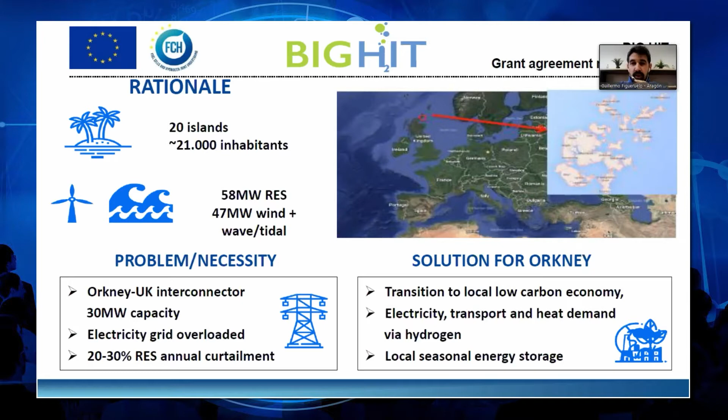So together with the Scottish government and the Scottish Fuel Cells and Hydrogen Association, they came to us in 2015, and we prepared the proposal for the Fuel Cells and Hydrogen Joint Undertaking, and we successfully won it. We are developing the project that you can see now on the screen.

So we have two main points of production of hydrogen: a 0.5 megawatt electrolyzer in the island of Eday, coming from ITM, the British entity, and also a 1 megawatt electrolyzer, same technology, same provider, in Shapinsay.

We store this hydrogen at 300 bar and distribute it among the consumption points across the islands via ferries. The storage is made in trailers provided by an entity from our region, which is a really important milestone for us, because we are committed to developing industry in our region too.

Which are the main consumption points? We have several residential uses for micro cogeneration, and we also have a demonstration pilot in a school to stay close to the community and the society.

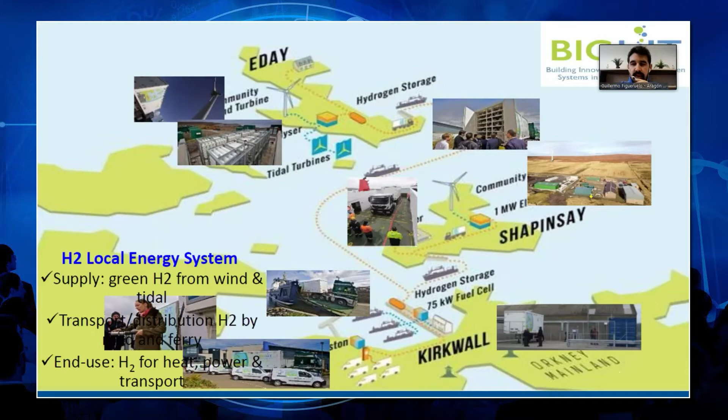We also have 75 kilowatts of cold ironing and grid service for ships staying in the harbor, as well as a small fleet of vehicles, Renault Kangoos. These are electric battery vehicles with range extended by hydrogen, in the main island, Kirkwall.

As I said before, we are currently in the demonstration phase, so we have started to see the local and wider impacts. This is the first pilot project of its kind taking place in Europe, so awareness and visibility are crucial.

We are also validating business models for the integration of renewable sources locally and in other locations, and we are helping to overcome grid constraints and reduce curtailment, which means generating more money and more local business for the community.

We are also boosting the local economy through local skills and upskilling of qualified jobs among the inhabitants. We're glad to have been included in the panel of good practices in Europe, because this means we're doing some things well, but we're also making mistakes since we're learning by doing. Hopefully we can publicize these lessons learned to other consortiums, other ideas, and other regions, so they don't make the same mistakes as us.

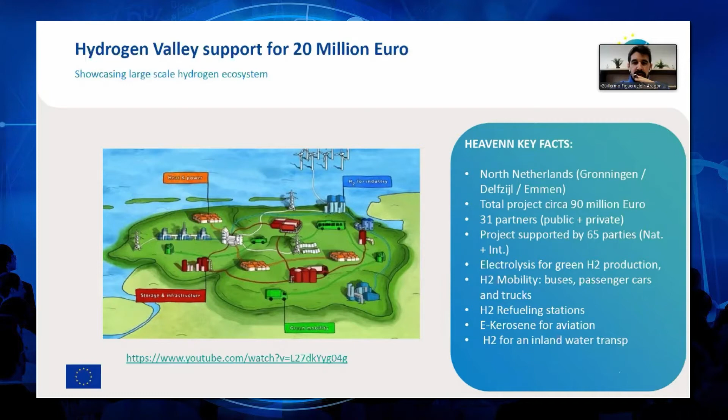We are also collaborating on a project that will start next January, also coming from the Fuel Cells and Hydrogen Joint Undertaking, from the last call that took place in April and that has just been evaluated. It will take place on an island — Mallorca, here in the Balearic Islands in Spain.

And well, we don't have a main role here, as you can imagine, nor in the HEAVENN project, but we are there for the replicability tasks, as well as for several transversal and cross-cutting activities that will support it and that are even more important these days. And I also have to mention this to give the overall scope of the hydrogen valleys concept and what is also moving outside of these European calls.

We have already seen in a previous speech that the project development assistance has already started. One case is taking place in Poland, and several cases are taking place throughout Europe. We are working there as an observer network, thanks to the experience we gained in BIG HIT. We have been called for that role, and we are very glad to help all the regions overcome their barriers and demonstrate that they are committed to the hydrogen economy.

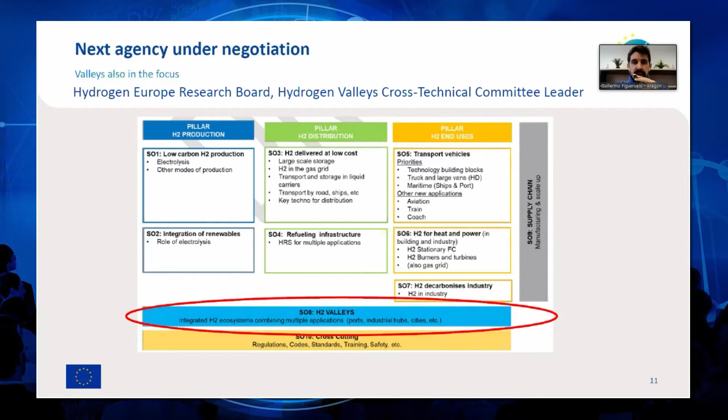We are also working on the next hydrogen call taking place starting in 2021 with the next European Framework Program, Horizon Europe. It will be called Clean Hydrogen for Europe, and we have a main role in some of the roadmaps, but we have the leadership of the hydrogen valleys. We are also leading the technical committee regarding hydrogen valleys in Hydrogen Europe Research. We are working really close with the European Commission for these hydrogen valleys territories and projects.

So if you have any doubt, I think you can have a really good partner here in Aragon Hydrogen Foundation for developing your idea and your project in creating a local and regional hydrogen-based economy. Thank you very much.

Thank you very much, and I am really surprised that your presentation really proves that your case, your project, is a good example to be followed, and it is the best fit for our session on lessons learned. Yeah, that's true. All the questions I had prepared were answered by you, so sorry, I have no question. And now we want to move to another speaker, another subject.

Very close link also with the sea, because we will talk about the Emden Seaport hydrogen project, and the presentation will be done by Mr.

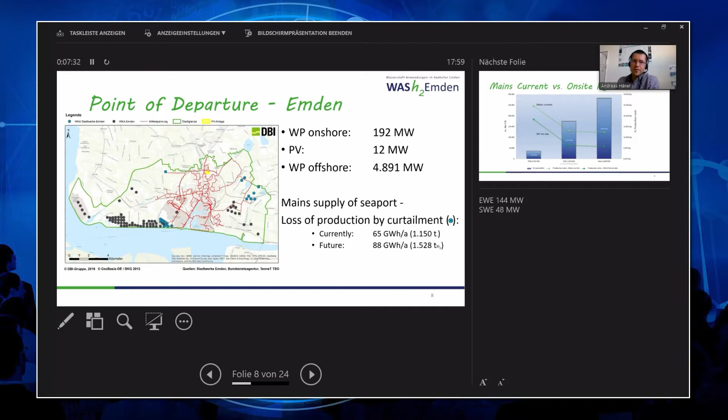An important question all the time is also how much does it cost? So we actually developed a tool within the project where we can calculate, for different conditions, how much the hydrogen will actually cost. This will help us for the next step to decide which electrolyzer to build and how to continue with the whole project.

The main finding, actually, what you can see all the time, is a question of scaling. If you are jumping from a very small electrolyzer to above 1 megawatt, you can decrease the costs from 25 to around 5 euros per kilogram of hydrogen.

And also you can see for these two green lines - the upper one is energy produced by electricity coming from mains current, and the lower one is electricity coming directly from the wind parks. You can see that already taxes and fees on the electricity are causing around one third of the costs of your hydrogen production.

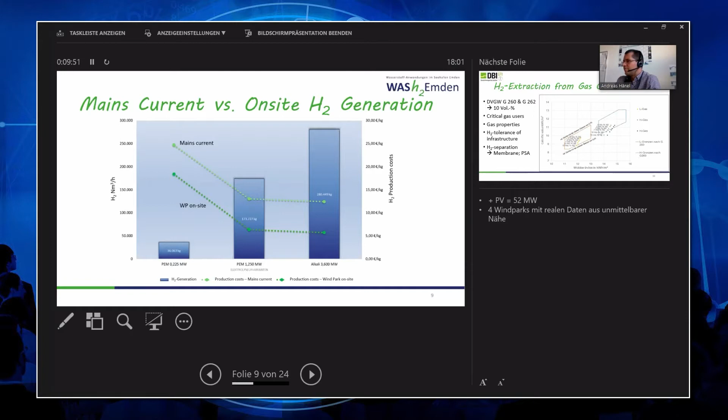The next interesting question is injecting hydrogen and also extracting hydrogen from the gas grid. If you look at the German market, the technical regulations by the DVGW, the G260 and G262, already now allow hydrogen content of 10 volume% in the gas grid.

I made some examples so you can see there are two possible gases in the German gas grid: L gas with a low calorific value and H gas with a high calorific value. You can see the frame, this is actually the limit of the gas group. Depending on the composition of the gas, for example for L gas here, there's already a possibility that you are still in this group - you can even inject 15 volume% of hydrogen into the gas grid and still fulfill all the properties given in the DVGW regulations.

However, in Germany, you don't find gas containing 10 volume% hydrogen, because you also have to think about critical gas users. Critical gas users are mainly filling stations for CNG cars, which mostly compress natural gas from the gas grid to refill CNG cars, and they are limited to 2% hydrogen. So already there is some problem, and also for CHP there are limitations to hydrogen content. So until you can inject and extract the hydrogen, you have to look at the gas properties, the heating value, how it changes, and the tolerance of the hydrogen infrastructure, so that you can inject the hydrogen.

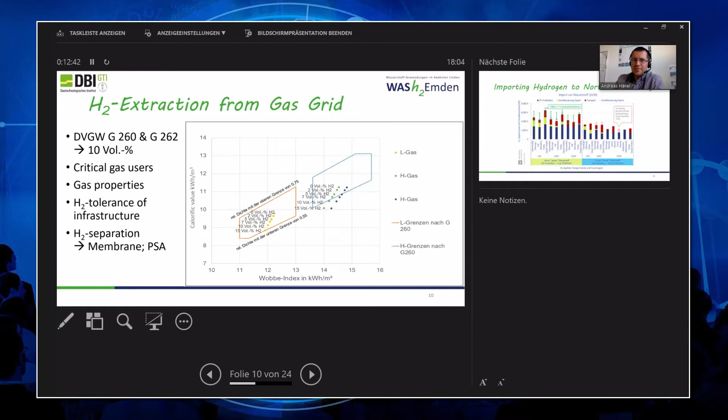Andreas, I see that you've used nearly all of your time and you're in the middle of your presentation, so please speed up a little. Okay, yeah.

Another part of the project was we looked at the import of hydrogen. You can see that importing hydrogen is still in some cases cheaper than producing it in Germany. So you have costs around 6 to 4 euros for importing green hydrogen, or between 4 and 2 euros per kilogram for importing blue hydrogen with CCS technology.

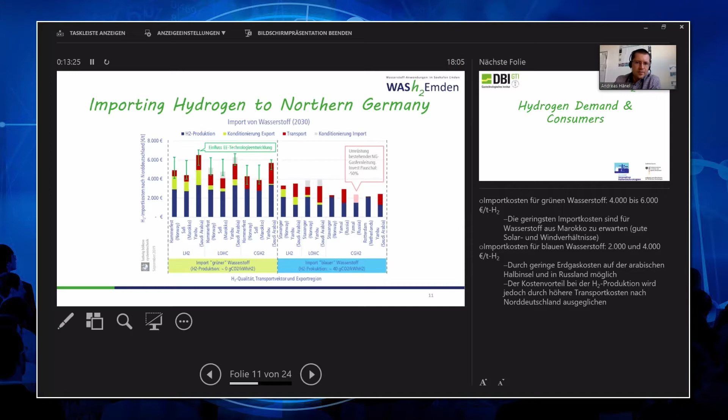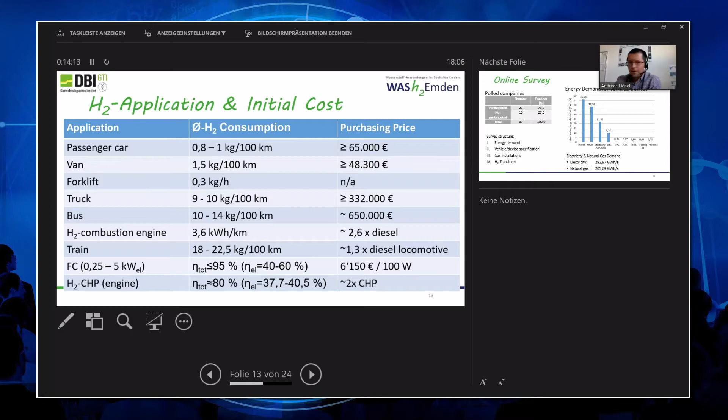Okay, so now about the most important part of the presentation. We analyzed for Emden the demand of hydrogen and which vehicles and devices can be fueled by hydrogen. I prepared a table with interesting numbers of devices which can be fueled by hydrogen, which were considered for the initiation of the hydrogen economy in Emden. We made a survey and polled all seaport companies, asking how much equipment they have, how many vehicles, and what their current energy demand is. We gathered a lot of detailed data on where the users are, how many forklifts are in the seaport, how many cars, and how much fuel of different kinds they use daily. You can see there's a very high demand on diesel and also very high demand on marine gas oil in the seaport.

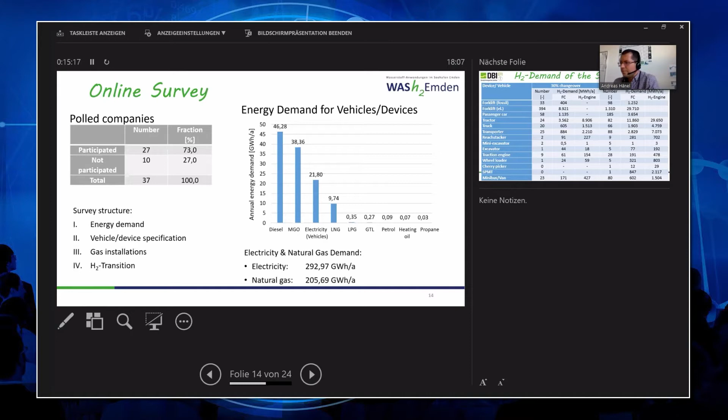I'll give you only 3 minutes more. So, 3 minutes more. Okay, yeah, 3 slides.

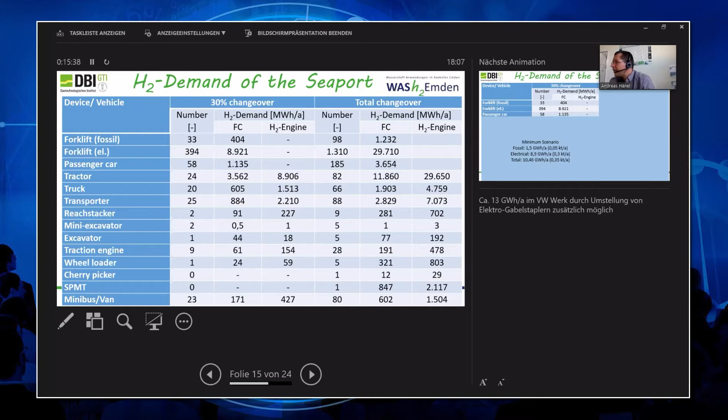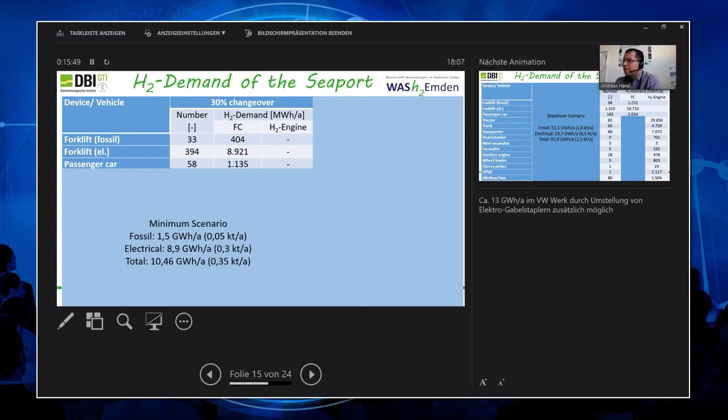So we know very exactly how many vehicles there are, and we made a feasibility study on how much hydrogen they actually need. For this, we developed different kinds of scenarios, looking at a minimum transition to hydrogen and also a maximum scenario for the transition, and from this we calculated how big the electrolyzer and the production costs will be in future.

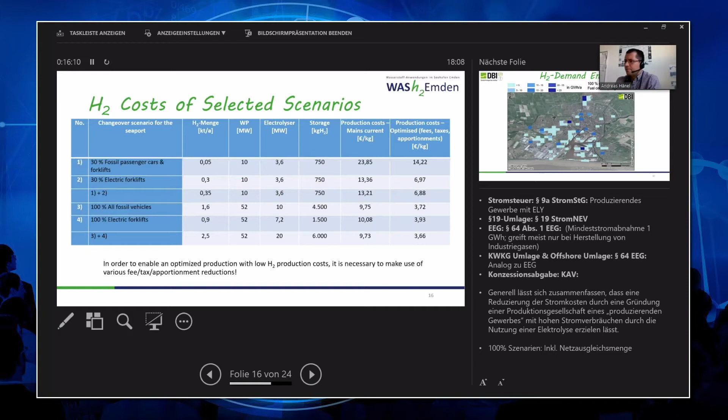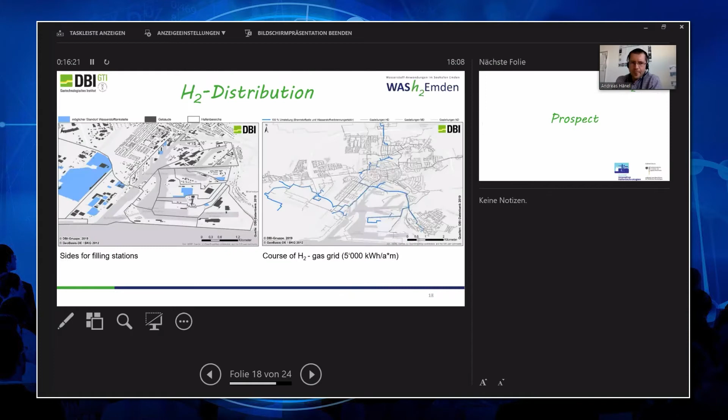And of course, not only for the seaport have we done this, we also did it for the whole city of Emden. With this, I'll come to the end of the presentation. The whole goal now is that we are in the process of preparing the pilot installation. We already gathered companies based on this study, and now we are asking them to commit to buying forklifts, to buying trucks, so that we can activate the market in the region of Emden and start a hydrogen economy in the region.

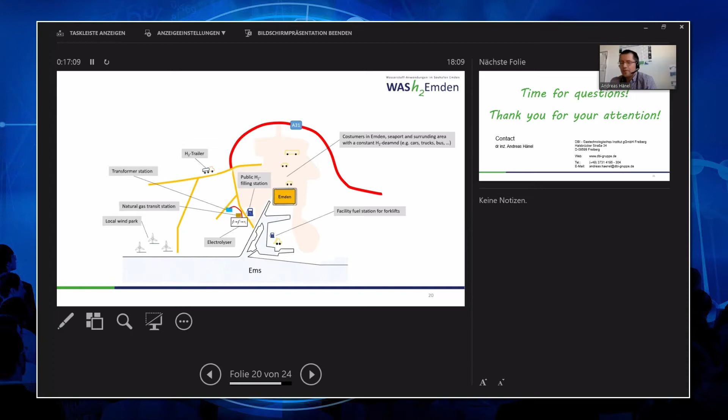So with this, I'm at the end of the presentation. Unfortunately it's a very short time, so you are very welcome to contact me if you have further questions. We can also discuss. Thank you very much for your presentation.

I think it's a really good example for our seaports, for Zarząd Portu Gdynia and Zarząd Portu Gdańsk. Now they know a good example of how to approach the project, or even better, to know the company and institute who can help them develop that project.

By this, we want to move to another speaker. Now we will talk about a different kind of application and details about the new approach to electrolyzers, because mainly all the electrolyzers we've been talking about are proton exchange membrane electrolyzers. Now the company Enapter will talk about their development and their modular electrolyzer.

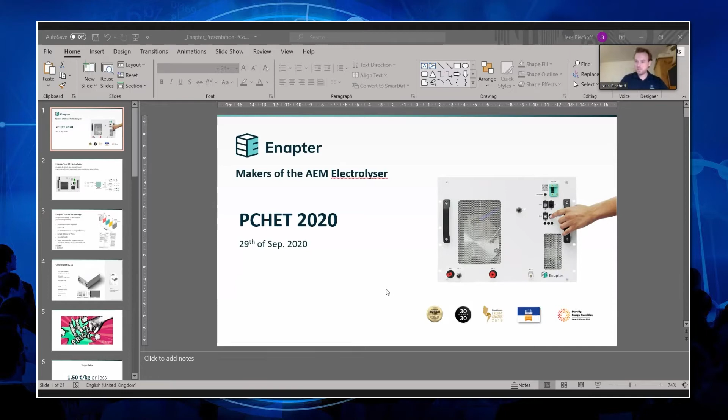It's a pleasure to be here today to introduce our anion exchange membrane electrolyzer and what we are doing. The first two presentations today were more related to bigger research projects and lighthouse projects, so to say. My presentation will focus a bit more on introducing briefly our technology, and at the end also show you some use cases where our electrolyzer technology has already been applied.

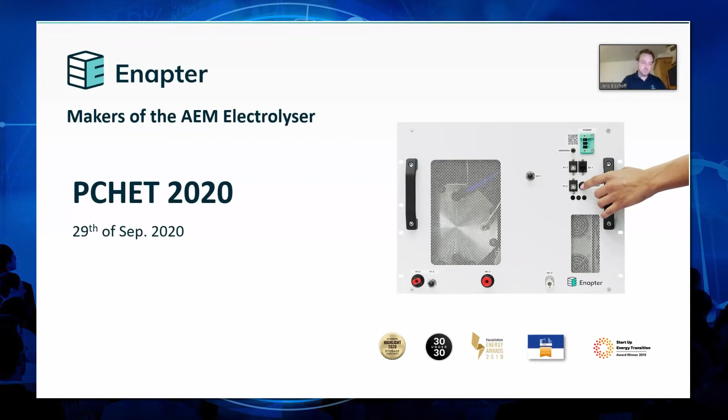At the beginning, I would briefly emphasize what Enapter is doing. Enapter as a company is really focused on the electrolyzer part. So we develop and manufacture the patented anion exchange membrane electrolyzer. And we are not a turnkey solution provider, so we provide our electrolyzer plus optional equipment which is needed for the electrolyzer to customers who use it by themselves, or to system integrators who will integrate it in a turnkey solution for their customers.

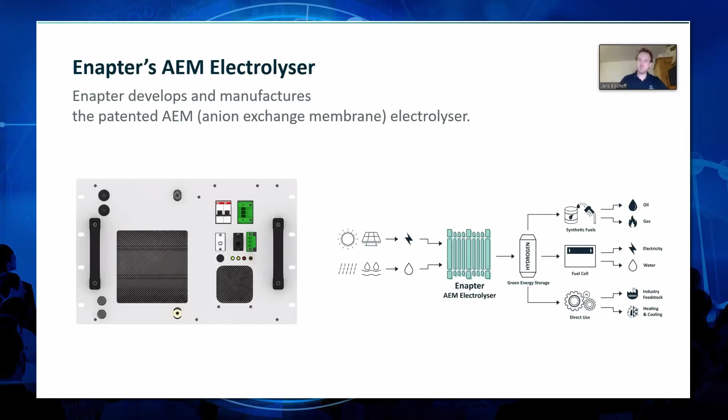So if you have such a diagram of a hydrogen system, you usually have for green hydrogen PV or wind energy as input, and water. After the electrolyzer, in most cases, you would have hydrogen storage and further equipment like a fuel cell or other equipment depending on the use. And we are really focused on the electrolyzer. But one other product we have is our energy management system, which I will briefly mention later as well. In our energy management system, it's also possible to integrate third-party devices.

A few words regarding anion exchange membrane technology. As was already mentioned during the introduction, it is a unique technology for electrolysis, and it's proven and patented already. Enapter was founded three years ago and took over the developments which were done by ACTA in Italy for around 10 years already before that. One of the advantages of the anion exchange membrane technology is that no noble metals are required, and thus you have a low-cost stack. But at the same time, you have great performance and high efficiency of the system, and a very simple balance of plant as well.

Compared to, for example, PEM electrolyzers, the input water quality requirement is also not too stringent. So filtered tap water or rainwater can work for our electrolyzer as well. Basically, in a nutshell, our electrolyzer merges the advantages of low-cost alkaline electrolyzers and proton exchange membrane electrolyzers.

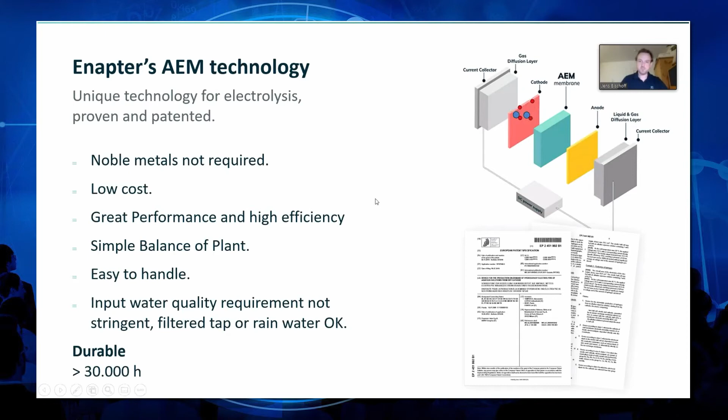So here you see our product. It's the electrolyzer EL2.1, and it produces half a cubic meter of hydrogen per hour and has very high efficiency. You only need 4.8 kilowatt hours to produce one cubic meter of hydrogen. Roughly speaking, per day, one of our modules can give you a little bit more than one kilogram of hydrogen. And that will already be provided and produced by the electrolyzer at 35 bar, which is very interesting for applications where you want to further compress the hydrogen, because you can skip the first step in the compression.

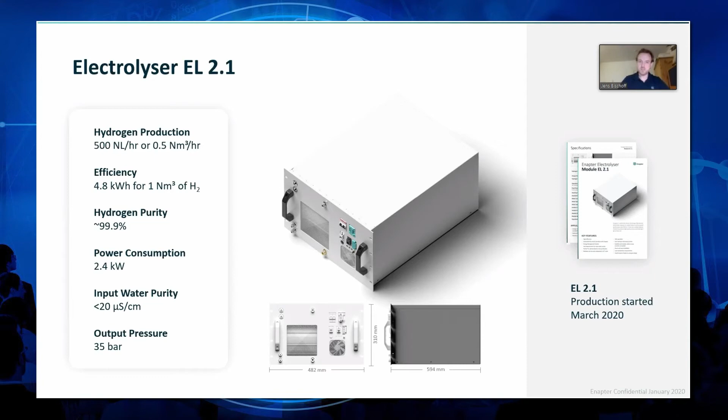So what is the goal of Enapter? Our goal is to reduce the price of hydrogen, on-site produced green hydrogen, drastically. We have the goal to reduce the capex cost of the electrolyzer to 1.5 euro per kilogram or less. That's calculated over the lifetime of the electrolyzer. In order to achieve this, we have to undergo massive scaling efforts, and I will show a few points of what we are doing here.

One important point is that we consider electrolyzers as a product and not as a project. If you consider the economic history, you can see that nothing has achieved cost cutting potentials as massively as mass-produced products. So we draw an analogy to the IT industry in the 1970s and 1980s. At that time, mainframe computers were still around, but there were big engineering projects that took up a lot of space, and step by step they were replaced by small modular computers and laptops later on.

One of the advantages of such smaller units is that you can easily produce them very quickly in a factory, and that's one of our strategies. Rather than producing very big central electrolyzers, we have a modular electrolyzer which can be produced very quickly in a massive factory. And we are currently planning to build a new factory to further upscale our production, which will open in roughly two years.

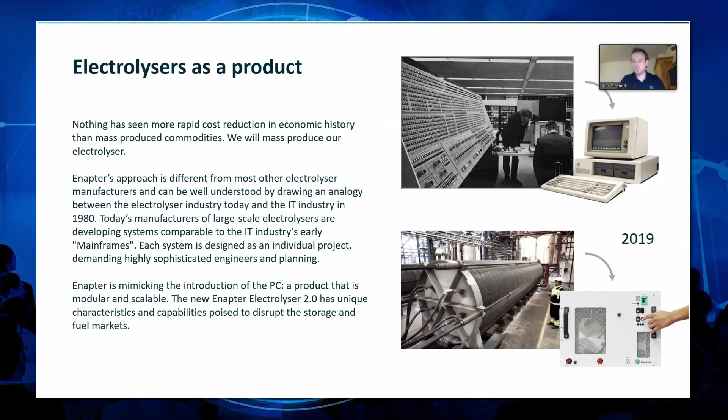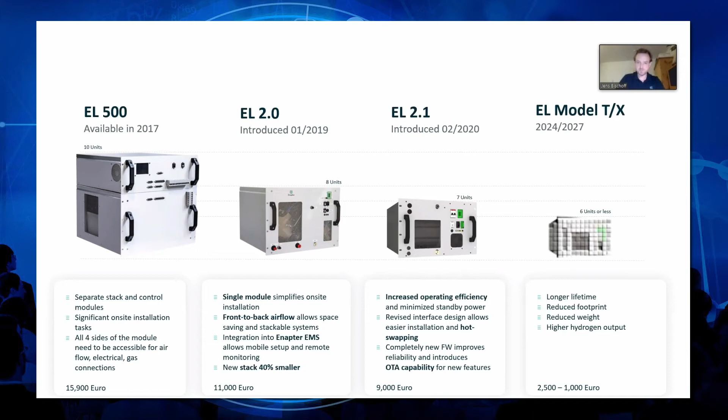The modularity of our system also means that if you have low consumption of hydrogen, you can just take 1 or 2 modules. But if you would like higher flow rates of hydrogen, you can integrate electrolyzers into a 19-inch rack. Here you see a configuration of 4 of our electrolyzers, a water tank module, and a dryer to achieve higher hydrogen purity. And if you need even higher flow rates, you can just add 2 or 3 cabinets next to each other.

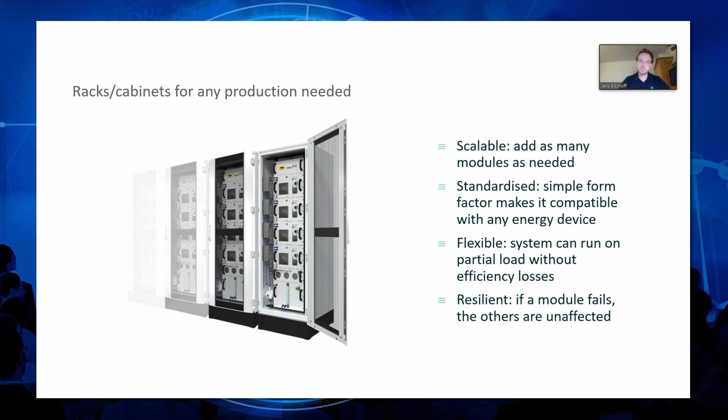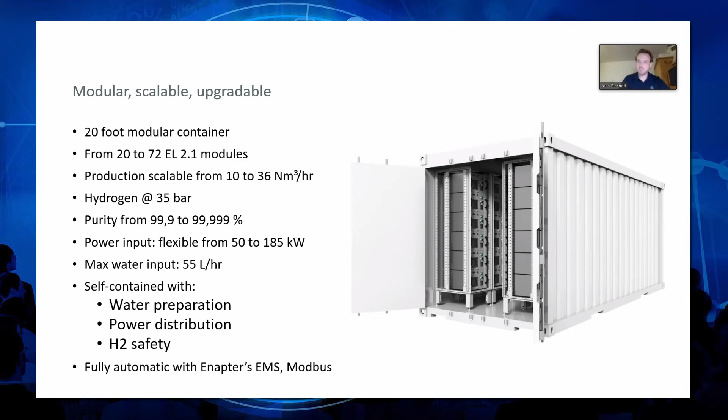The next step in modularity and scalability is our AEM cluster, which we are currently working on. It's a container-based design. In this container, we would still use our standard electrolyzer modules and stack them together. By that, in a 20-feet container, you could have around 20 to 72 electrolyzers and a production of up to 36 norm cubic meters per hour.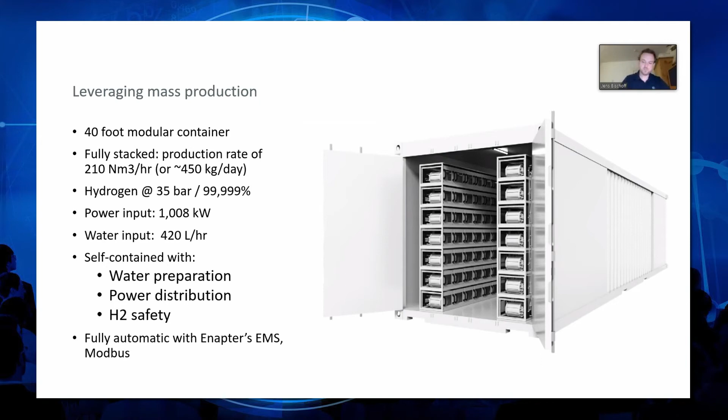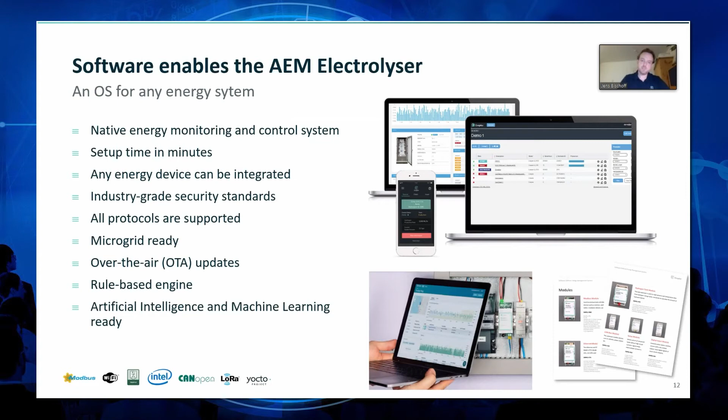The software, as mentioned, can integrate other aspects like third-party devices, fuel cells, etc. To save some time, I will skip the energy management system in detail here.

I would like to use the last minutes of my presentation to give you some examples of use cases where our electrolyzer has already been used. We have delivered our electrolyzer to over 33 countries and over 100 customers. We are not focused on a certain application; we have applications in all different thinkable hydrogen application areas.

For example, we have different applications for refueling. We have several customers who use our electrolyzer to produce hydrogen for hydrogen drones. We also have customers who integrated our electrolyzer into forklift refueling stations and other sorts of refueling stations.

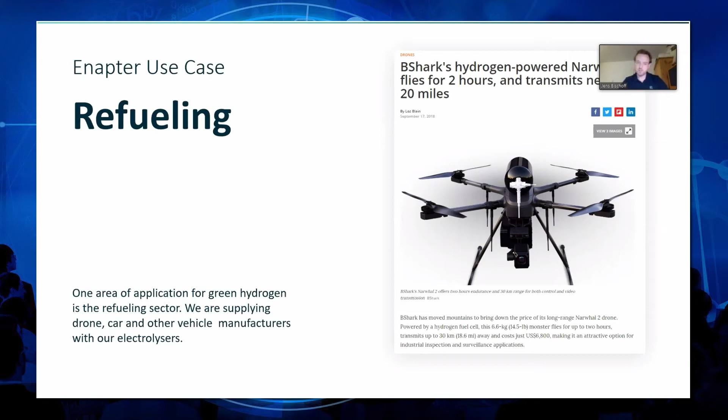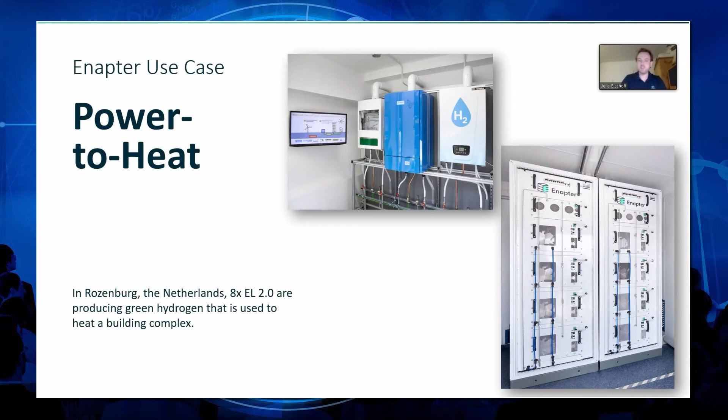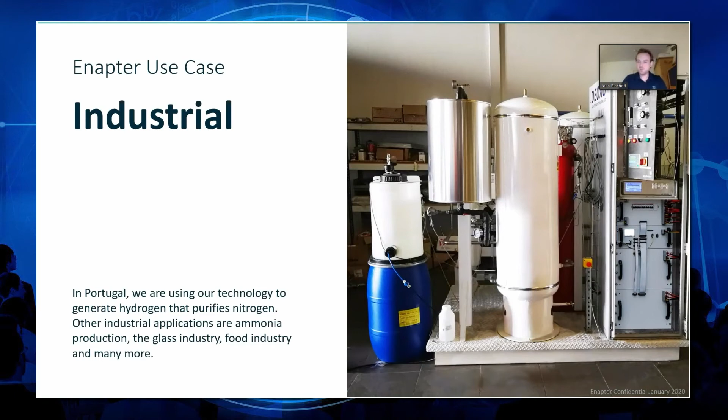There are also many different industrial applications where on-site production of hydrogen can be very cost advantageous over delivered hydrogen. We already have applications in the production of ammonia, glass industry, food industry, nitrogen purification, and some others.

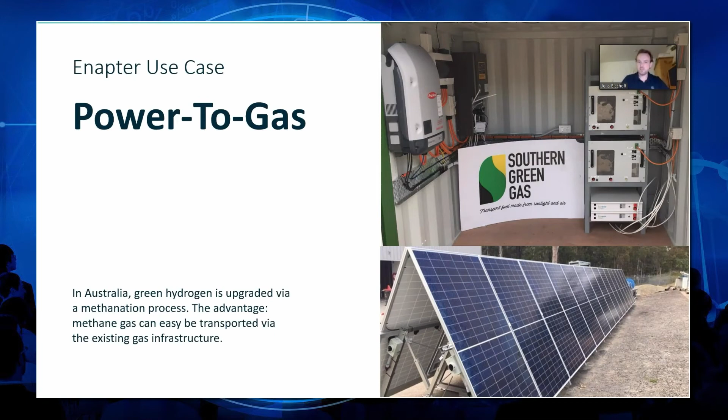Power to gas is also a very hot topic. Many of the gas TSOs are thinking about their business model in the future, researching how to integrate hydrogen into the grid. We have several customers who used our electrolyzer for small-scale demonstration projects to test how to integrate and feed hydrogen into the gas grid.

If you think this a little bit bigger, from a house perspective you can go to a microgrid, and that's also an application where our electrolyzer is already used in many cases. Like in the Mafate Reunion Island project, hydrogen enables a solar microgrid, and the hybrid of batteries, hydrogen and solar provides 5-day autonomy for this small village.

So thank you very much for your attention.

Thank you, Jan. You're perfect on time, exactly as we agreed. Very interesting presentation and very interesting solution. And I start to think about my home, and maybe to install such a small electrolyzer at my home in future when I buy the hydrogen car.

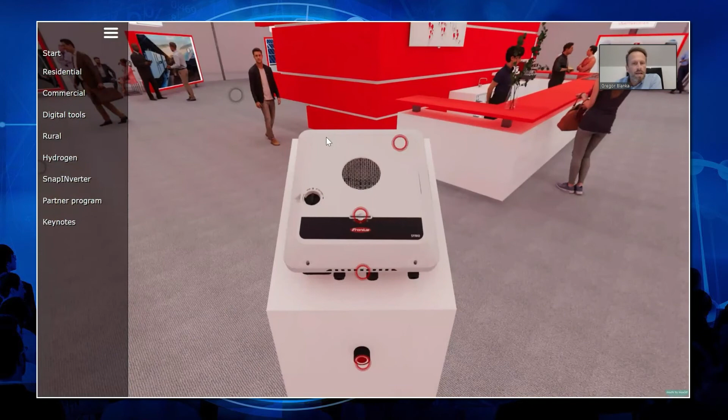In times of Corona and COVID-19, we still want to stay in touch with our customers closely and present our products. That's why we developed an interactive web page, which is like a virtual fair. You can go directly by typing virtual-fair.fronius.com/en for English, or DE for German. Or you can also go on our website, fronius.com, follow solar energy, and you will find your way to our virtual fair. Here you can take a look around and inform yourself about all our products, such as the new inverter, photovoltaic, a lot of information, a lot of videos, and you can get in touch with us directly.

Now let's take a closer look at our hydrogen product. It's called SolHub. You have to understand it as a ready-to-use system. It's a local hub for producing hydrogen locally, storing hydrogen locally, and using hydrogen, most of all for refueling hydrogen vehicles. Optionally, it's also possible to integrate a fuel cell for reconversion of electricity.

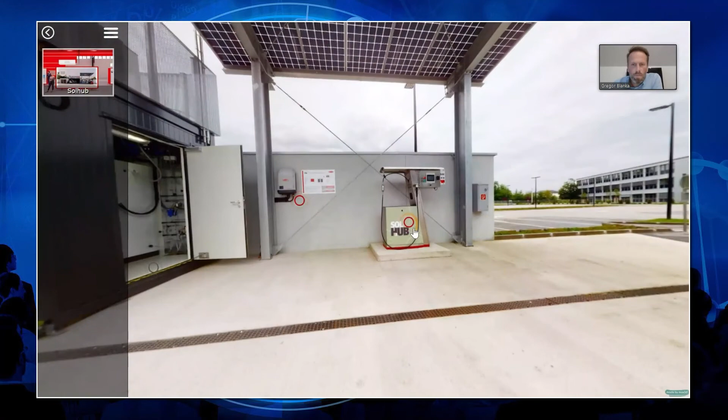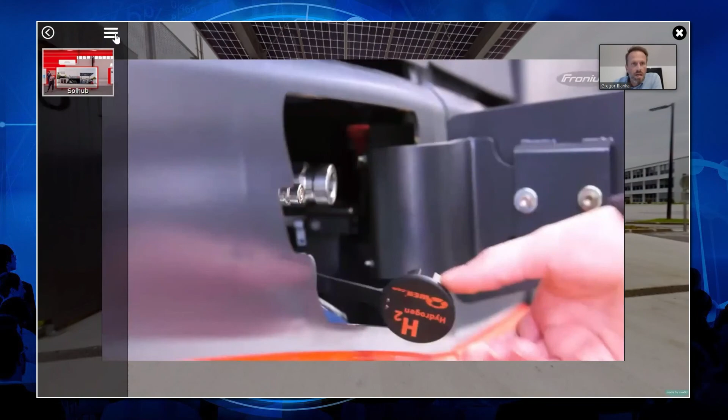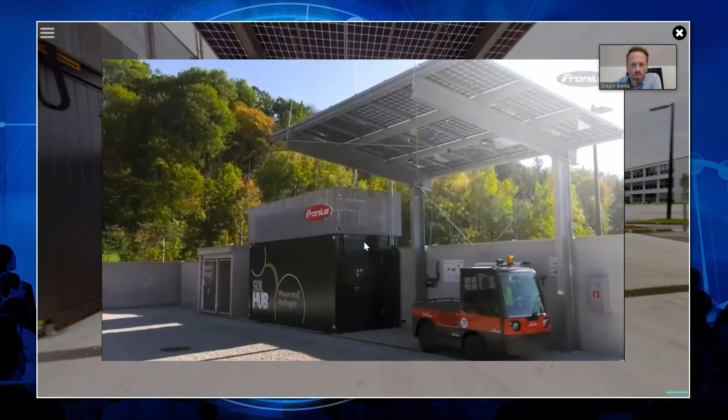I'm going to show a short video. What you see here is the refueling of commercial vehicles, but also of private cars. That means that we can provide SolHub in a 350 bar version, but also in a 700 bar version, and it depends completely on your needs. What you also see is that refueling a hydrogen car is as easy as refueling, let's say, a diesel car, and it's also as quick. It just needs 3 to 7 minutes, depending on the car.

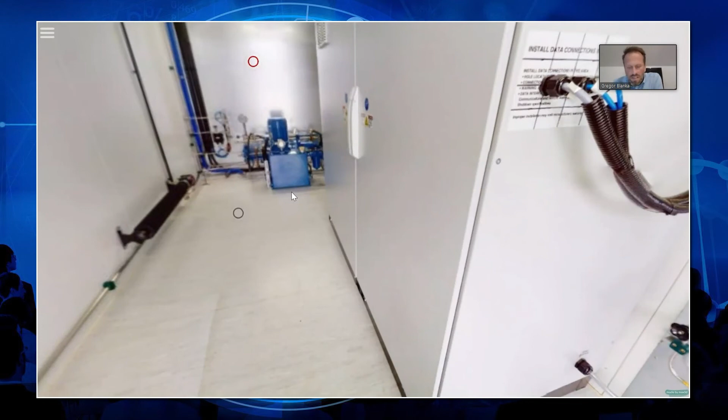So now we can go directly into the container to take a closer look. What you see here is that there's a lot of free space. Why is that so? Because SolHub is designed as a modular system. That means, for instance, we can put in this container between 1 and 4 electrolyzers. In this case, we have 2 electrolyzers.

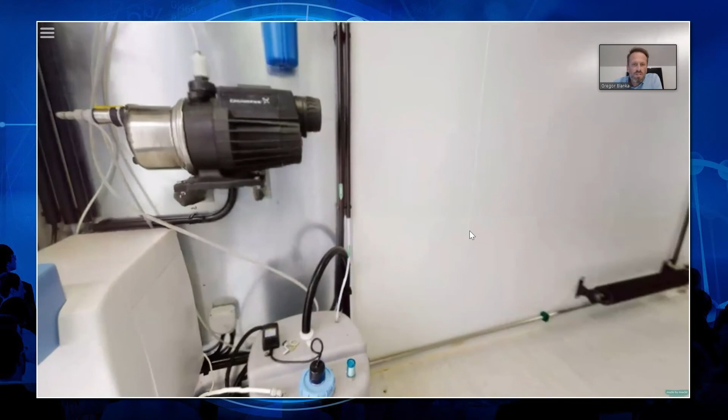On the left-hand side here, you see the water treatment. We just use normal tap water. The water comes into the electrolyzer, and afterwards in the background you see the compressor, and we compress the hydrogen to the needed pressure level.

Just for information, at the moment one electrolyzer can produce up to 13 kilograms of hydrogen per day. That means with 4 electrolyzers in one container, we can produce at maximum 50 kilograms a day. The next version, which will be available at the end of next year, will be able to produce 50 kilograms per electrolyzer.

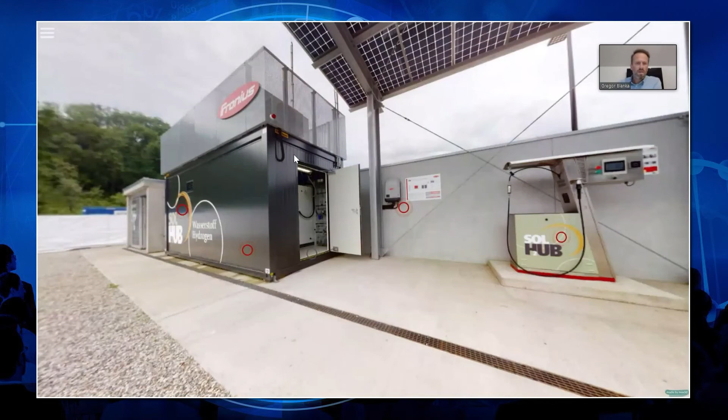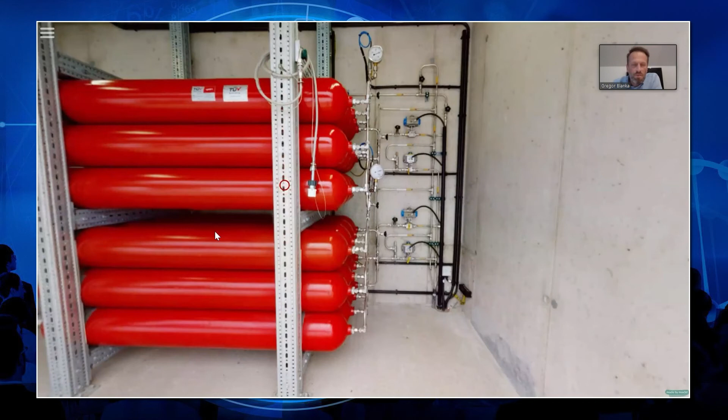And now I go outside of the container again and move to the storage, which is on the left-hand side. What we see, of course, is that hydrogen today is stored in, let's say, normal gas bottles. Again, here, the same situation as in the container itself.

It depends completely on the customer's need, how many bottles he gets, how big they are, which pressure level we can provide. When we think about seasonal storage of hydrogen, from summer to winter for instance, then normally we don't need such a big pressure. I would say 30 bar is enough, and then we use bigger bottles. When we think about commercial vehicles, we need around 400 bars, because they run at 350 bars, and private cars of course need more pressure, so then you need 700 bars or a little bit more.

I really invite you to take a look at our virtual fair, and maybe a last piece of information about SolHub. SolHub, as I said before, is a modular system. It depends how much hydrogen you want to produce, then we can put more or less electrolyzers in the container, or how much you need to store. It's also possible to have one, two, or three dispensers, with different pressure.

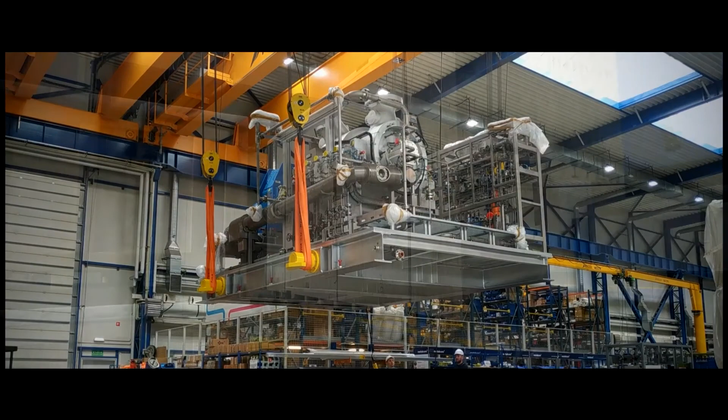From the very beginning, we feel the urge to move and discover the world. We walk, ride, drive, and travel. We're always on the move to learn, work, relax, keep fit, explore, and of course, to meet each other. When we can't, we confine our very nature.

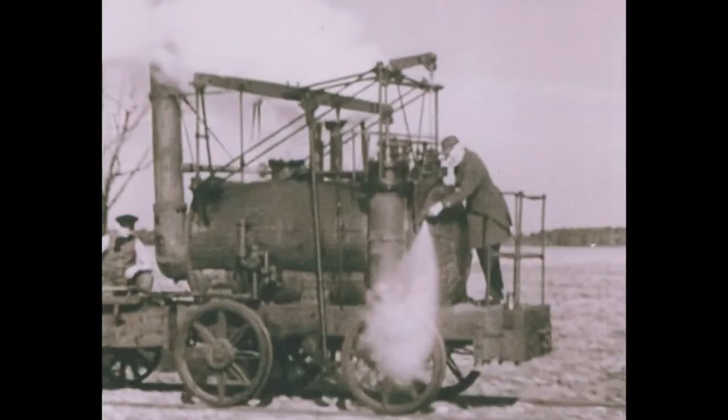We depend on mobility for ourselves and for moving all those things we need and want in life. We've always been very ingenious when it comes to getting ahead faster, more safely, more reliably, and with greater comfort. Today, we need new solutions for new challenges. This is what drives us. This is why we're so passionate about mobility and always go that extra mile to move beyond what's possible today.

We are pioneers in transportation, helping our customers keep the world in motion. As their trusted partner, we create ways to move people sustainably and seamlessly, from the first mile to the last. This is our vision. This is what we're moving toward and beyond.